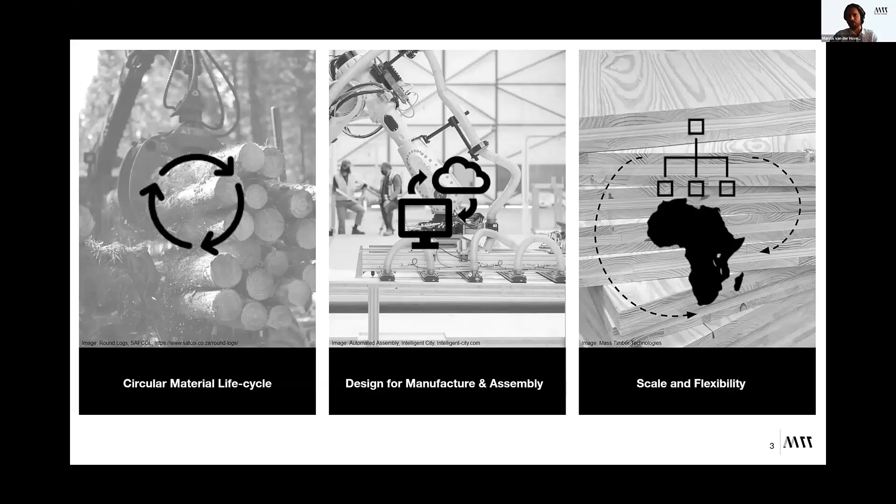The other element that we want to really focus on is the concept of design for manufacture and assembly, where we use the skills and technology available in 2023 to really solve all of the building design issues in a digital space rather than on site. And of course, the ability for mass timber, a material that we are learning about and bringing into a new context, to scale and be flexible enough to engage with many different building problems inside of the construction environment. Some of these techniques require us to engage with more advanced techniques of manufacturing, so a lot of CNC cutting, and obviously the integration of the project team in a digital space.

But it allows us to really create a material which, unlike anything before, can solve multiple building problems at one time. So, for example, if you use a CLT slab as a floor slab, you can also use it as a ceiling in certain instances. And for us, we're looking at a material that may be a little bit more expensive as an entry point compared to things like concrete and steel, which are prolific inside of the African context. We need to start thinking a little bit out of the box to make this material better, and we need to convince the project teams and the way that the projects get programmed to allow this material to become more relevant in the building environment, on a commercial scale at least.

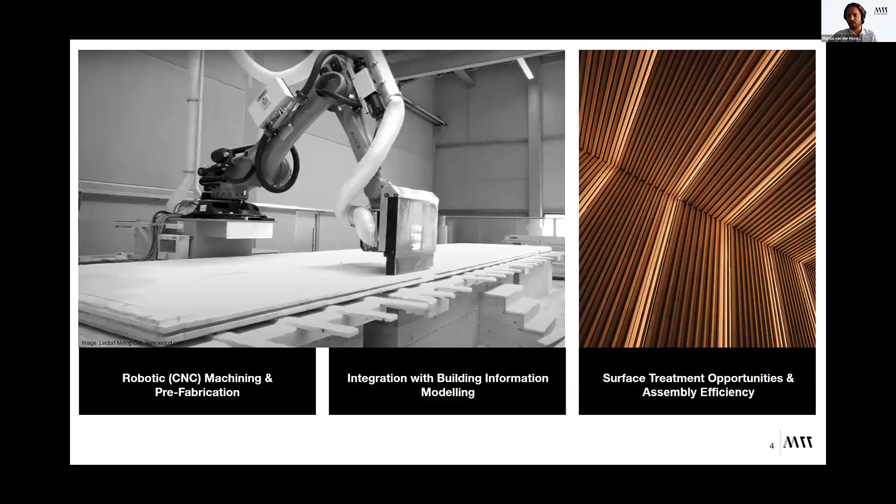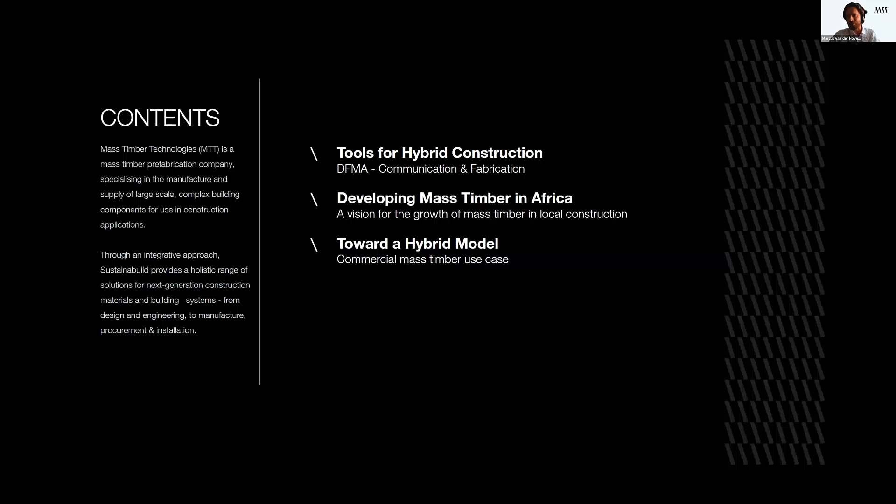So certainly, we're all aware that there's a massive climate issue at this point, and as building professionals, we need to be aware of the fact that our industry is responsible for the majority of our issues, especially when it comes to CO2. Cement and steel fabrication are the biggest contributors to this space.

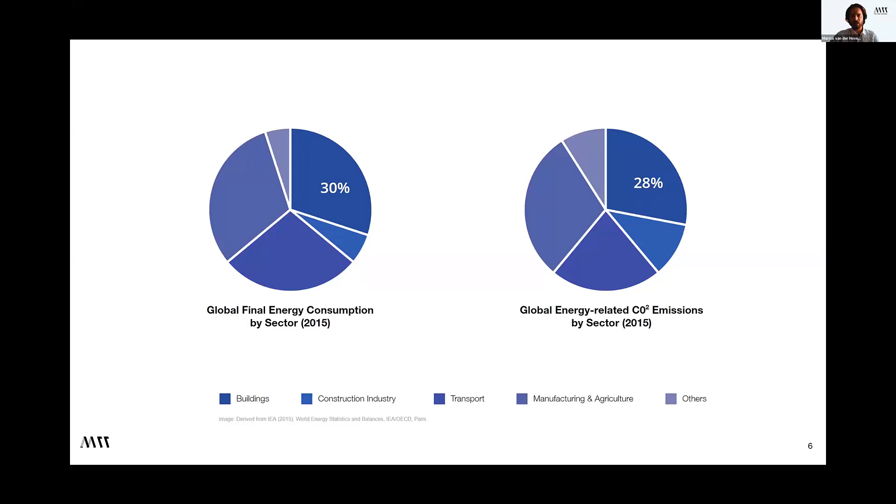And what we're trying to do is very quickly find a way to replace some of these primary structural elements like steel and concrete inside of the building environment to try and make a bigger impact on how climate change is developing. This is a big problem at this stage because it's not like we can just stop building tomorrow and just sit back and relax and just not use concrete.

We're expecting a massive boom in population, specifically in places like Africa. So the requirement for housing, the requirement for floor area and offices and infrastructural development is growing at a rate where we need to be ready with our skills and our abilities to actually solve the problem, rather than contribute to it.

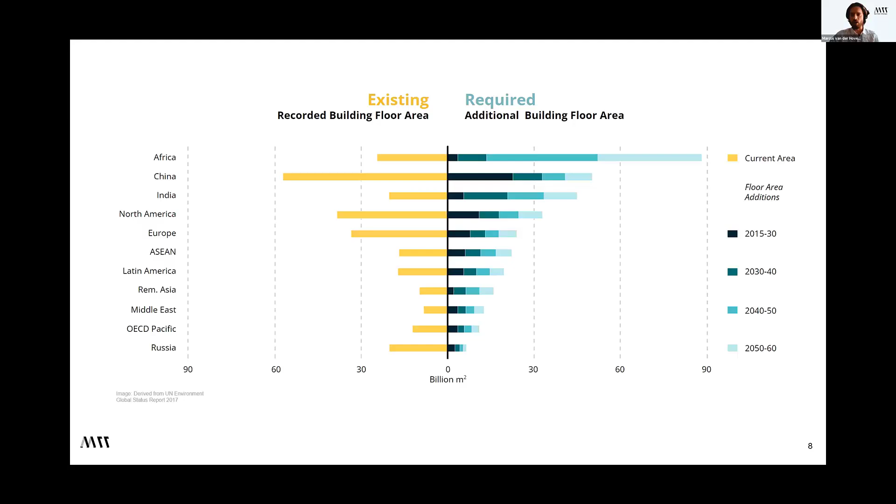And you've seen in many different instances, and specifically in South Africa, we've signed up to a pledge at this point, but it's slowly but surely becoming legislation where new buildings by 2030 need to operate at net zero carbon. And this is a big ask for the construction environment at this stage. And it's a big question, especially when you look at the structure, how we're going to solve this problem. And we believe from our side that it comes through in the form of mass timber.

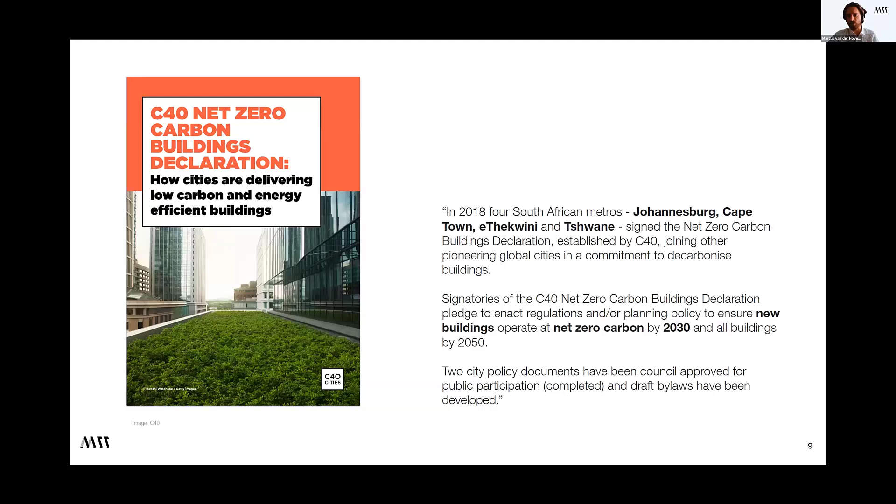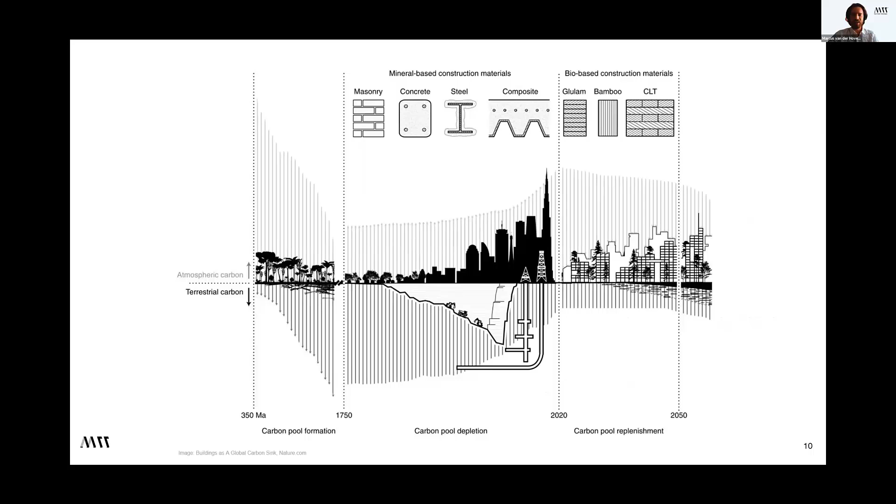So the big move that we're trying to make is stepping away from extracting carbon out of the earth and releasing it into the environment, but rather sequester it and keep it locked away inside of buildings, and maybe not turn it into firewood or chips where there's no value. So CLT for us, just as a basic concept, we're adhering solid structural timber members into a large slab to use as a structural element inside of a building.

You have many different forms, and we'll touch on some of those forms, and Oriel's also spoken about some of them. But what we're trying to do with mass timber and glue lamination of timber is create a predictable engineering curve for an engineer to be able to understand what the structural capability of this building is and do the mathematics around how that structure works.

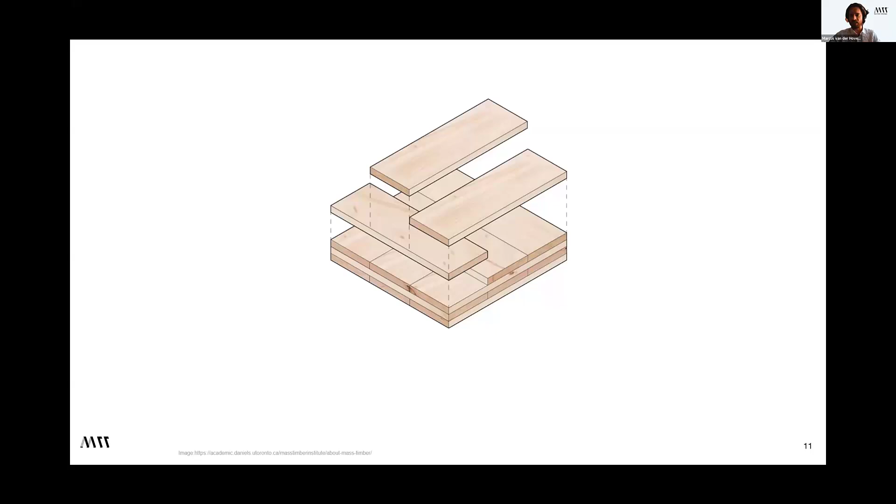Because timber is an organic material and there's different stresses and abilities to deal with stress on an individual plank. By laminating it together, we can create a homogeneous structural profile across that panel, and we can start predicting how it's going to operate. The same thing goes for the way it deals with fire. Same thing goes for how all these elements come together. It's all about making timber, which is organic, predictable.

And certainly, we're also not just doing this because of the environment. It's obviously a big player, but ultimately this industry growing in Africa represents a very large value proposition for Africa as a building context as well. Very often we see that our material is mined out of the ground, it's sent away to China to be turned into steel, and we buy it back at a premium, paying dollars for it.

So what we're trying to see happen here is the ability for us, in a very big industry in our continent, to localize our entire value chain. So from the guys growing it in the ground, the people sawmilling it, the people manufacturing and designing, and then the builders, we can actually contextualize that material completely to a region, which obviously helps with everything from shipping and logistics costs, and certainly the value that we can contain and maintain inside of our local context.

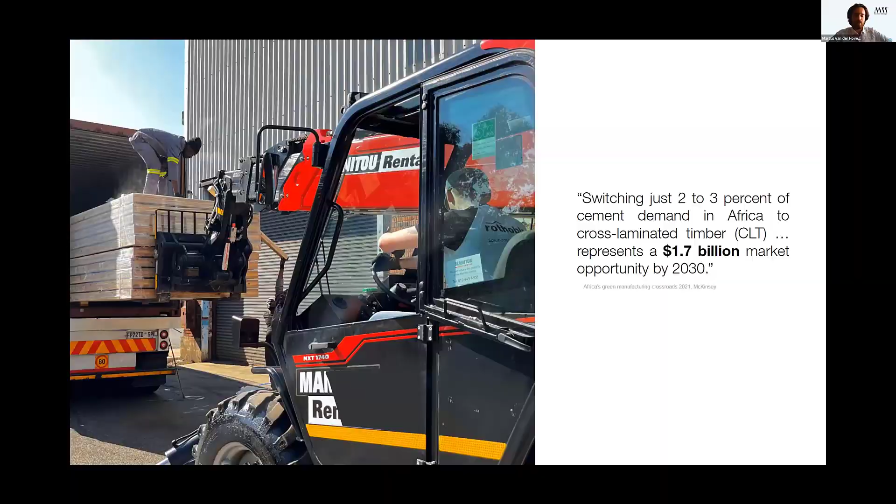So we've been manufacturing some pretty large elements at MTT right now. We've kind of taken a very big step, and since November, we've been operating and producing at a massive pace with larger and larger buildings coming together, everything from small residential projects up to a 4-story high building, which is currently being shipped to Zanzibar for construction in a couple of months, which we're very excited to see.

And it's all constructed out of 2 basic principles that we're focusing on. CLT, which is what we use to create floors, walls, and roof structures. And then the GLT components, which is simply just laminated in one direction and not cross-laminated, so that the performance of the fibers works in one direction, which is very good for columns and beams. So by bringing those 2 elements together, we can actually start solving an entire building problem rather than necessarily just doing small bits here and there.

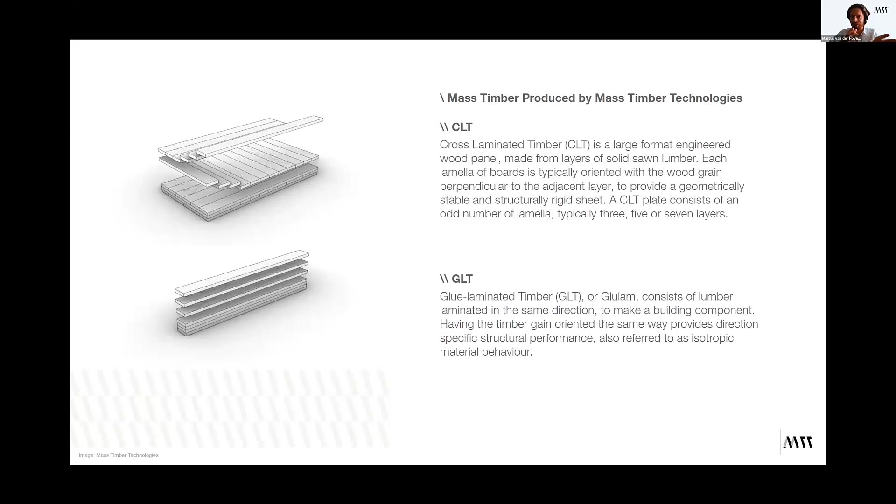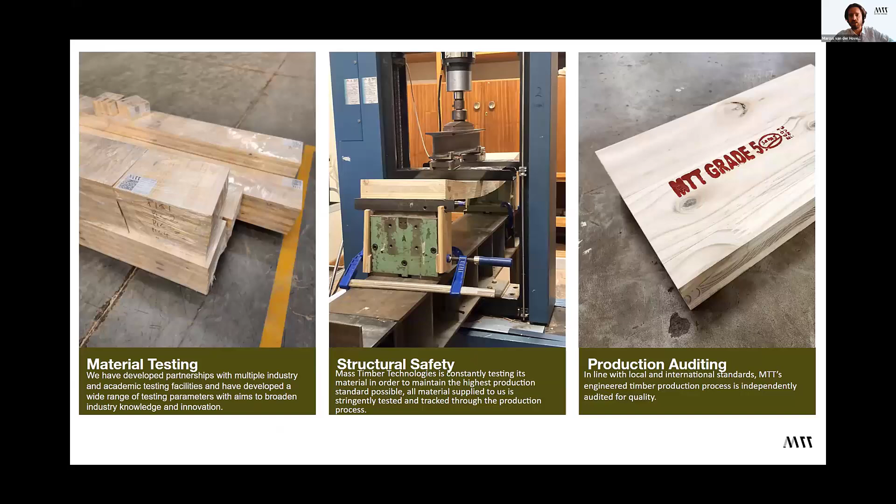We've done all the relevant testing on our local material, which is obviously SA pine. It's various different species, which I won't get into right now, but from multiple different contexts, we've managed to do the stress testing. And with the certification body in our local context in South Africa, there's actually a building code relating to our material now, which we comply to. So these are very big steps, especially in South Africa, that we've made towards making this material more accessible.

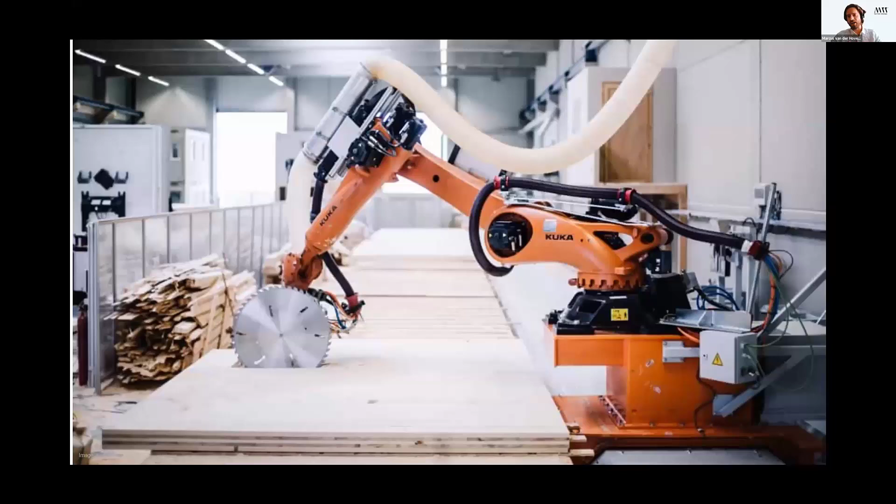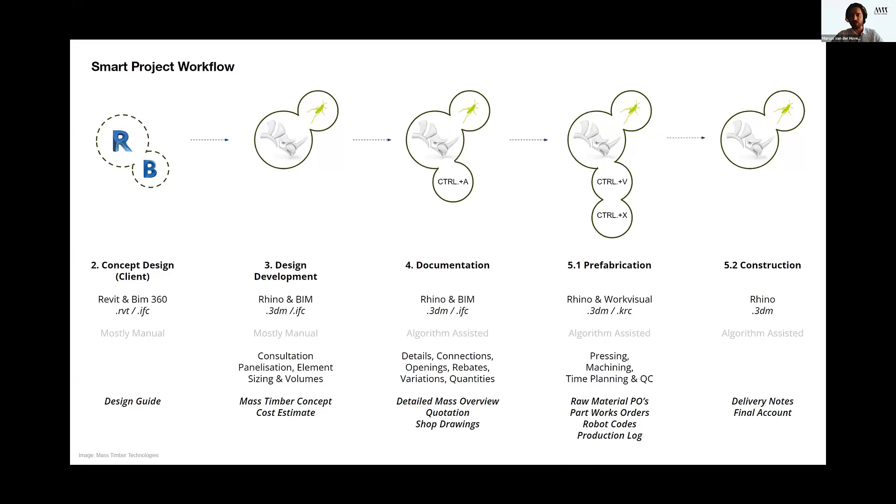We've also got a lot of work behind us, which is really the software element to actually help us integrate all of this into our systems. And this runs all the way through from being able to integrate with how an architect thinks and then turn it into a digital set of information that we can then access as manufacturers, and then the builder can use. And like Oriel said, it's trying to turn it into a kid's plaything where it's like a Lego assembly kit with a set of instructions, which makes a simple process of installation on site possible.

So obviously we've done a lot of different coding. We've managed to set up a whole bunch of different robotic techniques to actually fabricate this, which means that 99% of the building is actually created inside of a factory, in factory conditions, very accurate. And that means no waste on site, a very small labor contingent on site, no mistakes on site.

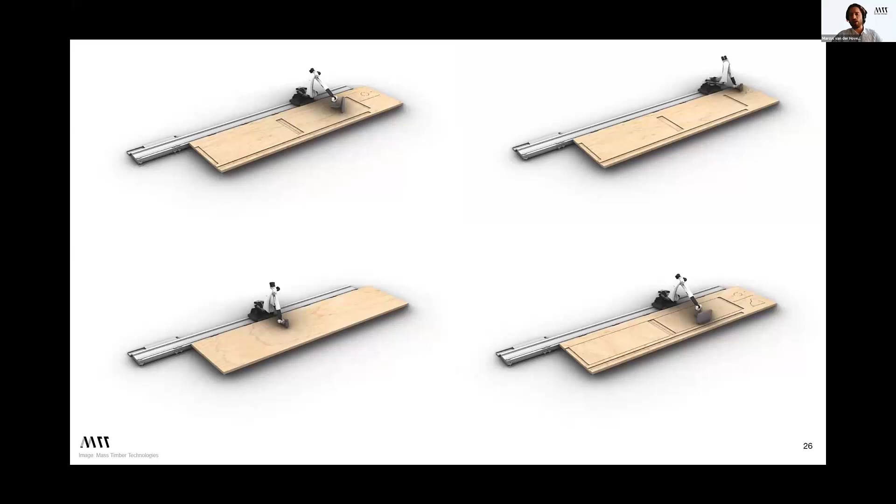And when you start adding all of these things up together, you'll see how effective the mass timber system can actually be. And what we're trying to do is basically pull the construction environment out of a terrible hole that it's sitting in, and using information technology and advanced manufacture, we can start creating a more effective and efficient way to build.

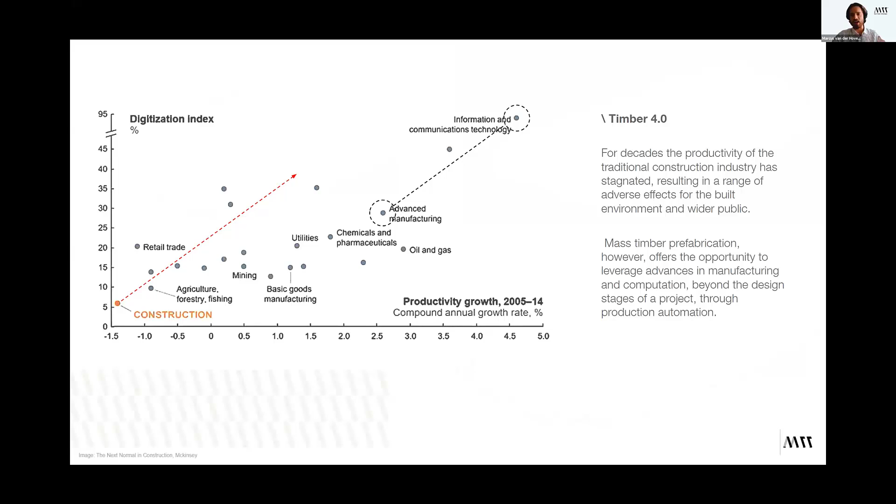And I'll touch on fire in a minute, but yeah, the tools are there now. We've done the research for you and it's available. So there's no more excuse not to be able to use this material in your project.

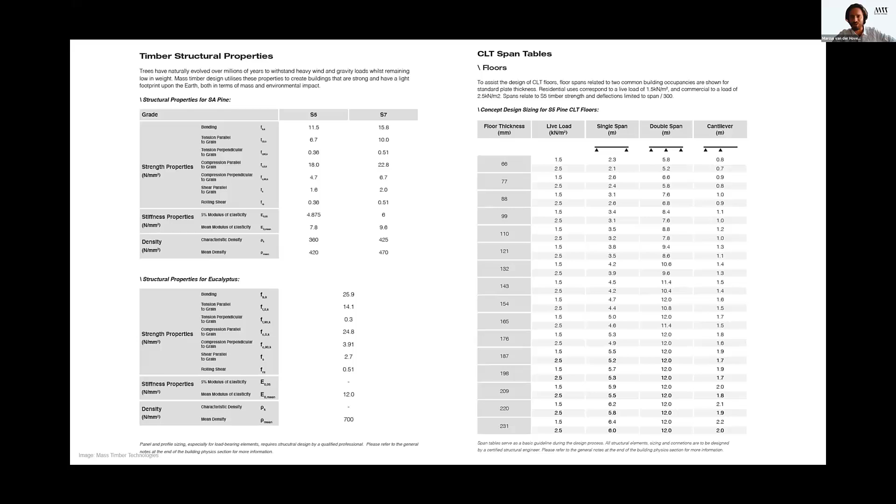So ultimately, what we're trying to do is make the difficult process of planning a building exist inside of a digital space. That's the core thing that I want to drive home: our ability to design with CLT inside of a digital space is where projects become really efficient.

And what we're trying to do is take all these different components, because there's a lot of them when you build with this technology, and turn them into data that can then be very easily understood on a building site. And we'll show you an example of this quickly.

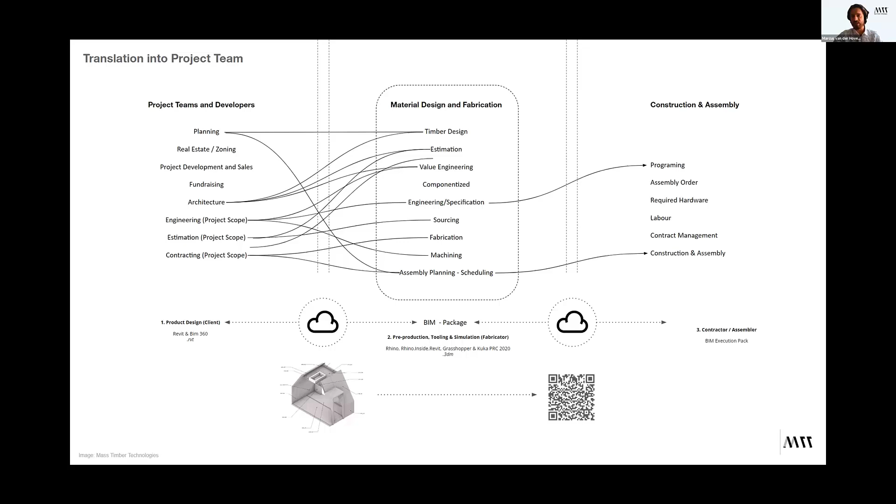Here's a house that we've just completed in Johannesburg. It's a designer sitting in Durban, an engineer sitting in Cape Town, us in Johannesburg, and none of us were actually in the room at all when we did this project. And the entire project got to site with a contractor that's never used CLT before.

So we simply worked with the engineer to work out exactly the different connections, the different screw placements and the thicknesses of the panels. And once we went through all of that, we could create a digital twin of our building that the engineer and the architect could both sign off on, and the working drawings could be created by our system. And then the contractor could very easily assemble this.

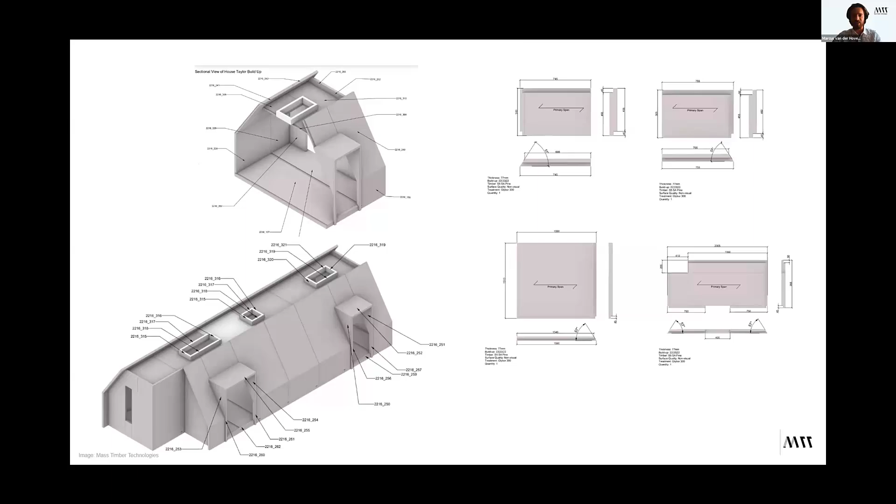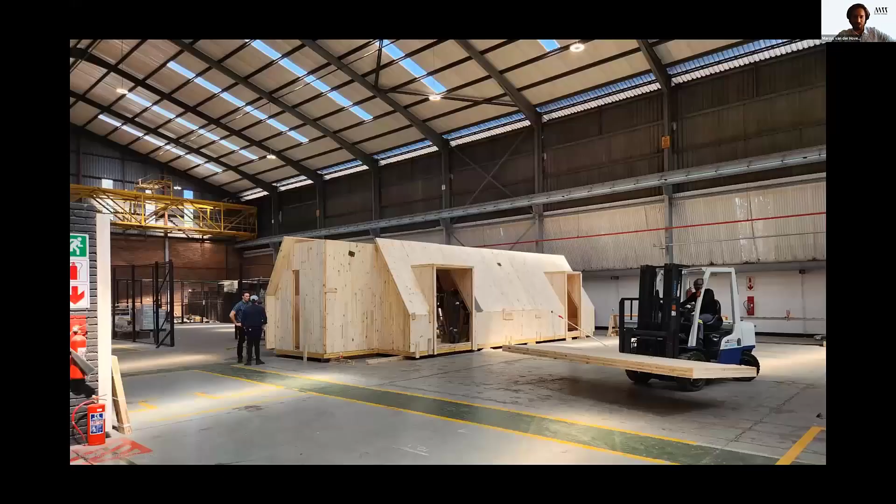And what that has allowed for is that a contractor who's never used this material before could, within 1 day of using this material, we did a quick mock-up in our factory using our gantry crane, get this building constructed to this stage here, him and 3 other people with a bunch of screwdrivers and the right techniques. And we've managed to create a very easy system, which made it very easy for the client to accept this material as well.

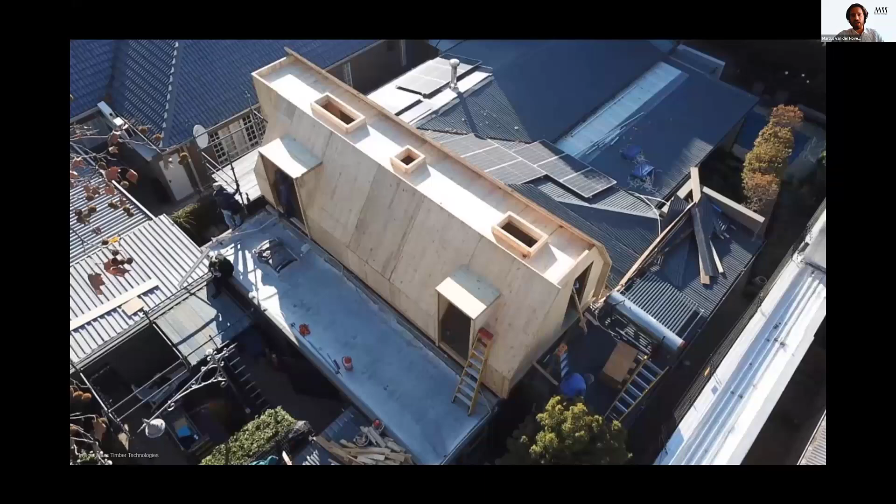So they had to take a section of the client's roof off, and day 1 was removing the roof. And by the end of that week, the building was actually in place and ready to be cladded. I've just got a quick video here, which will basically show you exactly how the site looks on this client's house as well. And you'll see there's no wheelbarrows, there's no cement, there's no water, there's no damage.

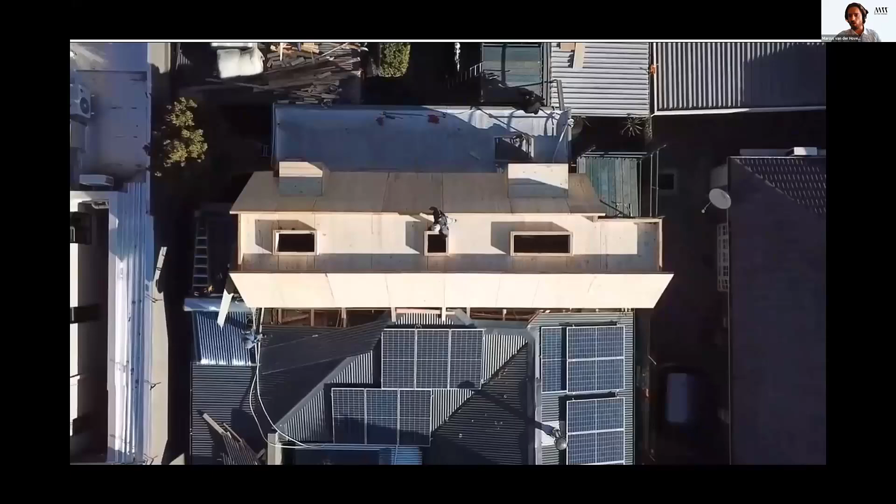This is a very effective way to build. It's a healthy way to build. The contractors like it because they end up being cleaner when they go home than when they arrive to site. And it's a fundamental thought process that we in the construction environment need to change our minds about when we look at a building site.

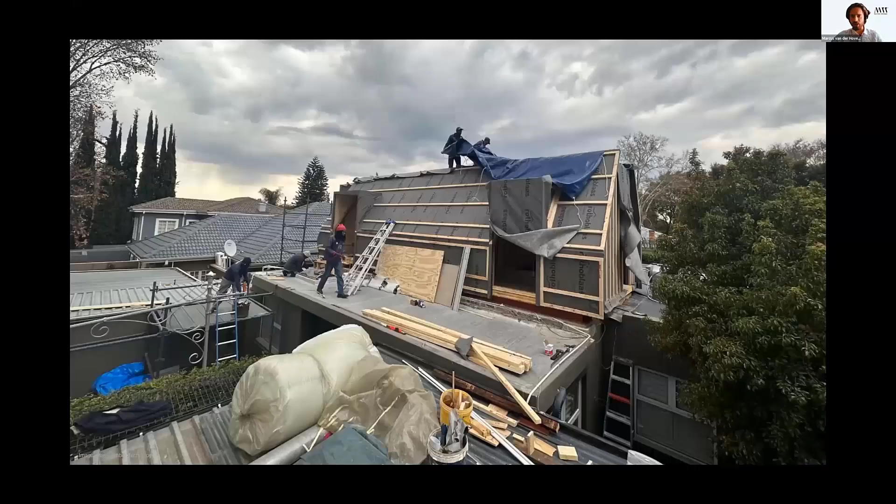So yes, by the end of that week, the building was weather tight and ready to accept cladding, and actually got completed. The building was done, I think, in 2 weeks. This whole construction process was finished. So they had the full European spec. The client was quite keen to do the whole shebang.

So they've actually insulated and cladded on both internal and external faces, surface mounted all of the conduiting. And it was a very effective process, a very easy way to build because there's no cutting and welding and difficult materials on site. It's just screw in and there you go.

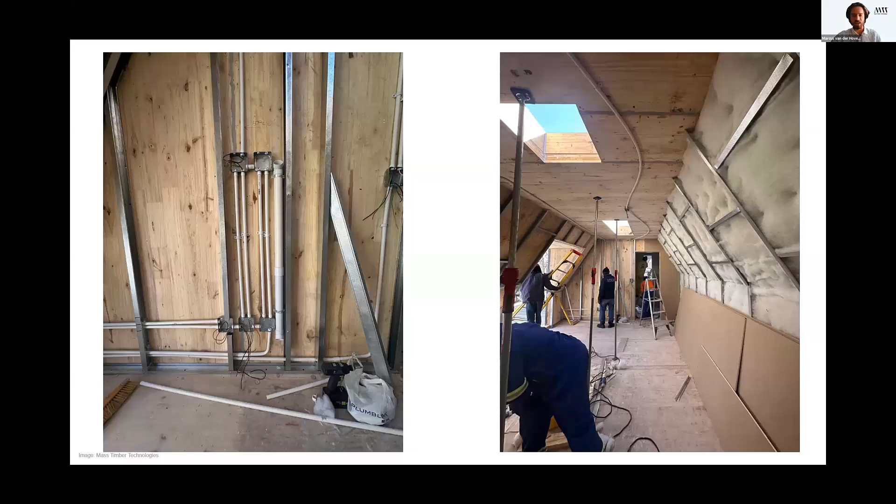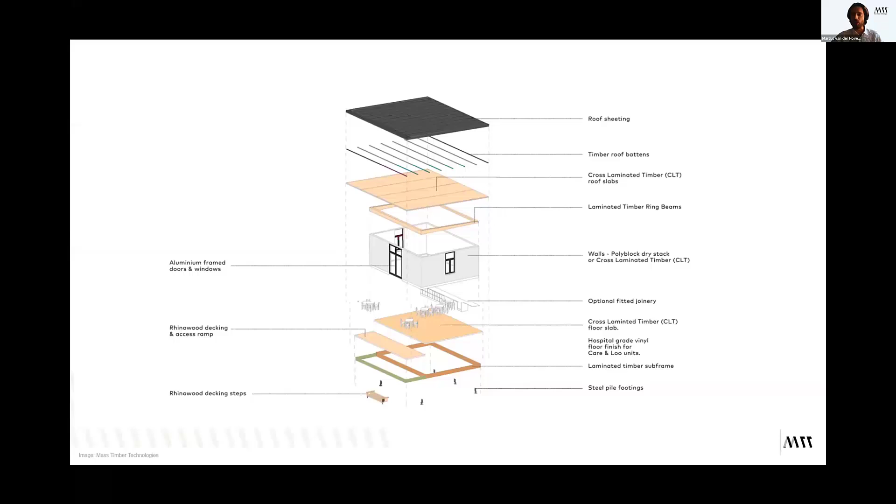We're also able to build with this material in very remote places. So here we did a project just outside of Drakensberg. This building got built in 5 days as well. It's a lower spec of construction, but we have the ability to go to places where you don't need water or advanced technology or big contractors, you just arrive with a crane and a system that has been worked out all on the front end so that when you get there, it's ready to go. This is how you make this material very effective.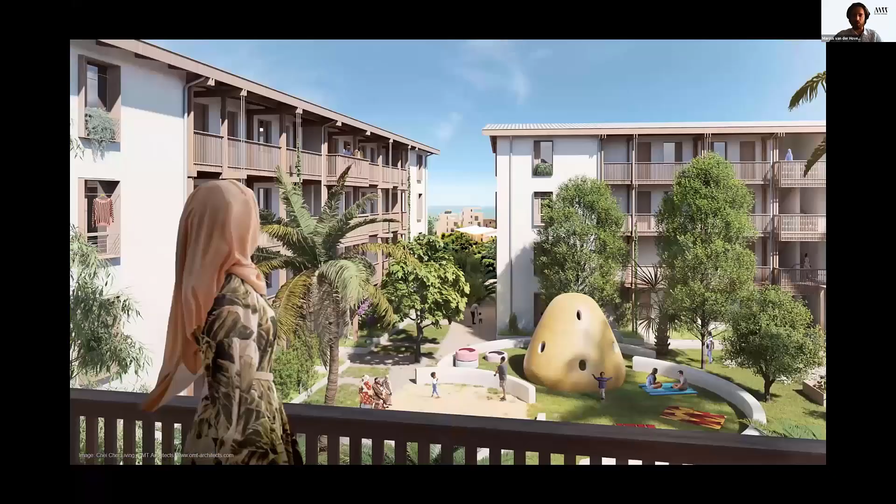So right now, one of the more exciting developments we're working on is the Chei Chei project, which Leander will also mention. He's the architect on this project. It's a 4-story high development on Zanzibar Island. And this project as well was designed with an architect operating out of New York some days, Kenya some days, and the Netherlands some days, engineers in Germany, fire engineers in Germany as well, and the client in Zanzibar.

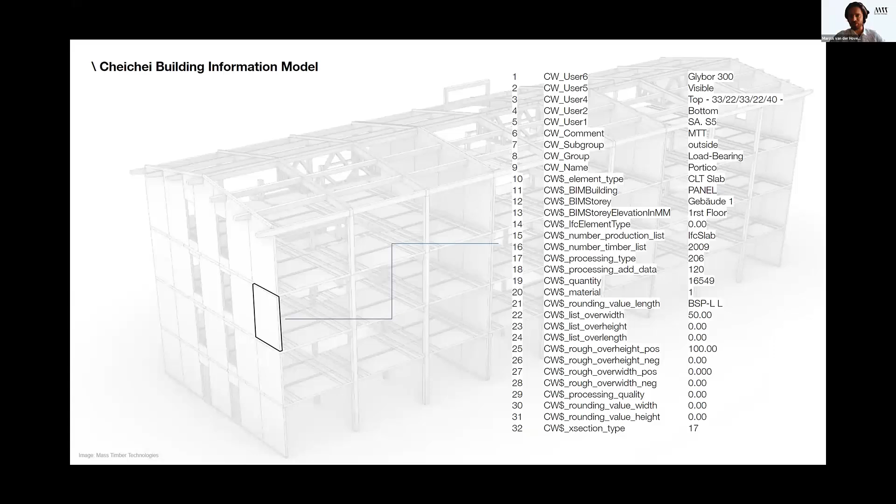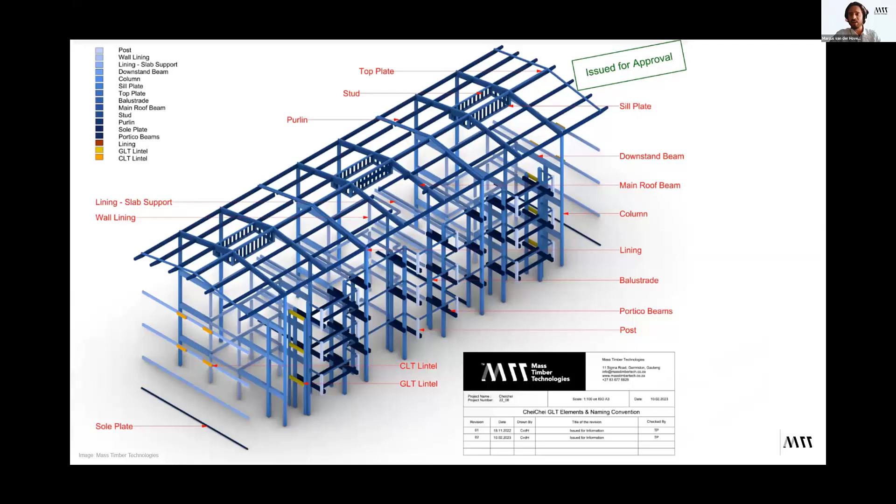It's a global project, but ultimately our team of 4 people were able to unpack this project by using building information modeling to contain all that information. It's quite an advanced way of thinking in terms of being able to actually use the full potential of our design software. But once we get it right, it's so easy to understand, and there's so few mistakes that are able to happen. So we can define the components of the building very effectively and create an environment that mistakes and waste don't happen on site.

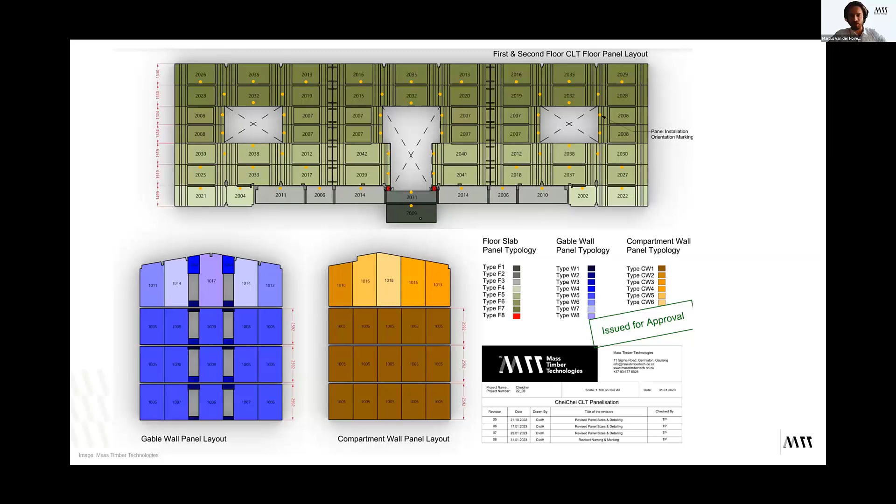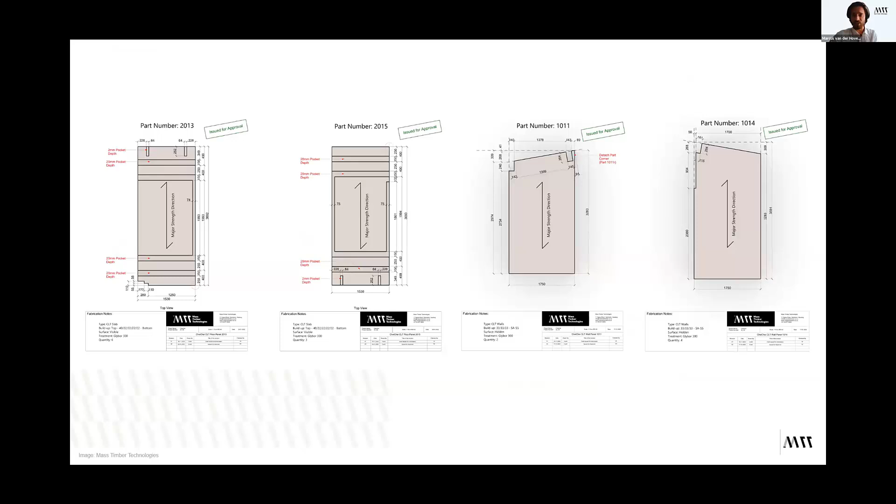So we can actually containerize an entire 4-story high building inside of 4 containers and send them, and it still works out in terms of a very acceptable budget if you compare to other materials as well. So, for us to be able to break down that building into all the different joinery techniques that are required for us to then machine, it's very important that this information gets understood by all the parties involved. But then for us to go and access 1,091 total timber parts, and 165 of them are unique.

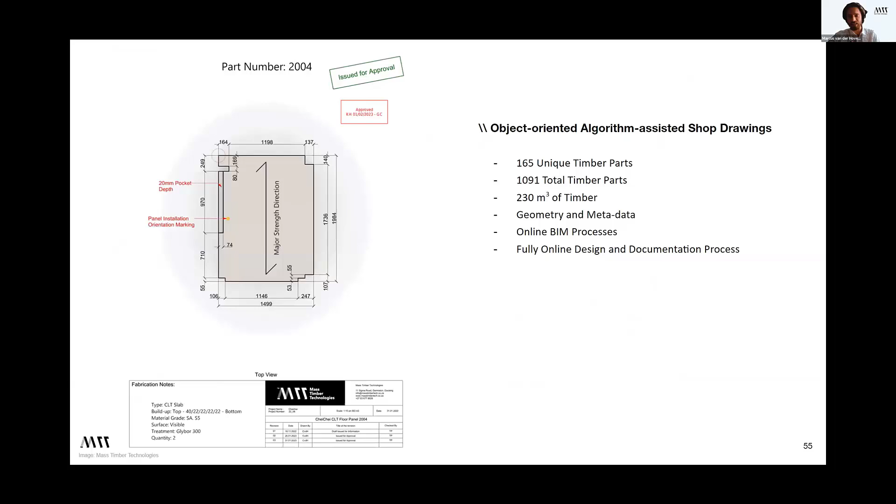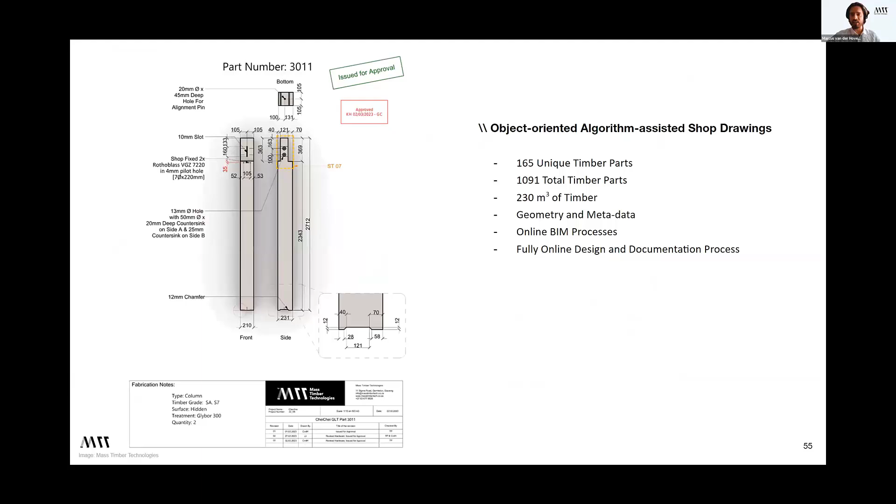Again, it's a mind shift that we have to work away from, where you typically go to a building site and go pack bricks and then you're done. But here we have to actually do all of that thinking on the front end, and that's what makes this material work so fast on site. And that's where we win in terms of how the costing and the pricing works. We have some very interesting technology that we're developing, which is like generative design algorithms that help us work the most effective panel sizes once we have all of the designs together. But I won't get too deep into this.

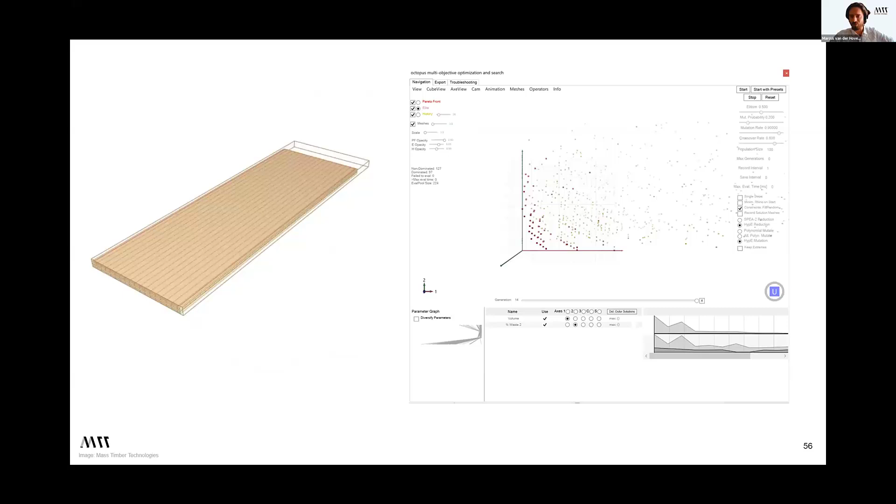But it is about us being able to, in an African context, we're all South Africans. There's no fancy German technology here. It's just our own minds and our access to the internet and research. We can actually make sure that we're on the leading edge of material thinking and computer generated work as well. So yeah, this is what a 4-story high building looks like, flat pack, like a piece of IKEA furniture. So yeah, it was a very fun project for us to work on.

Inside of our design guide, we've also actually listed out all of the different details, which we've taken from the European context, and we've rationalized them more for a South African system. So you can look at this and you can start understanding that maybe we don't have to build our walls so thick, but we can actually access the material a bit easier and make it more effective for our local context with different climatic requirements as well.

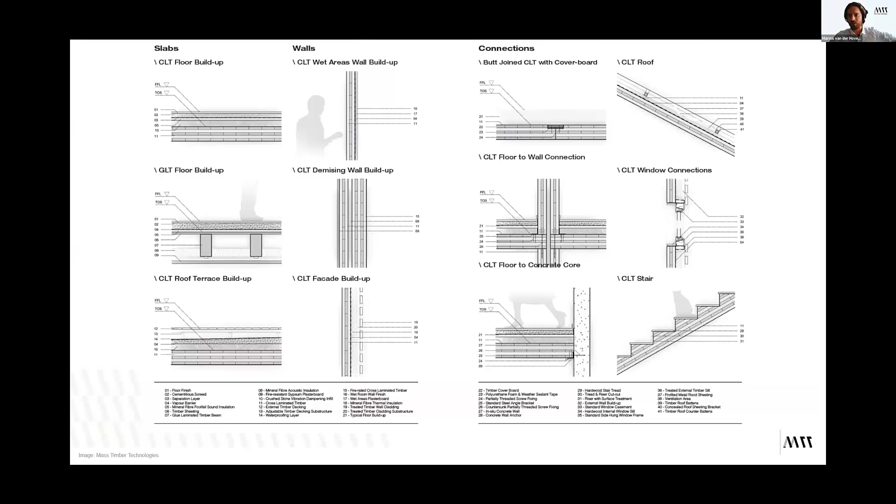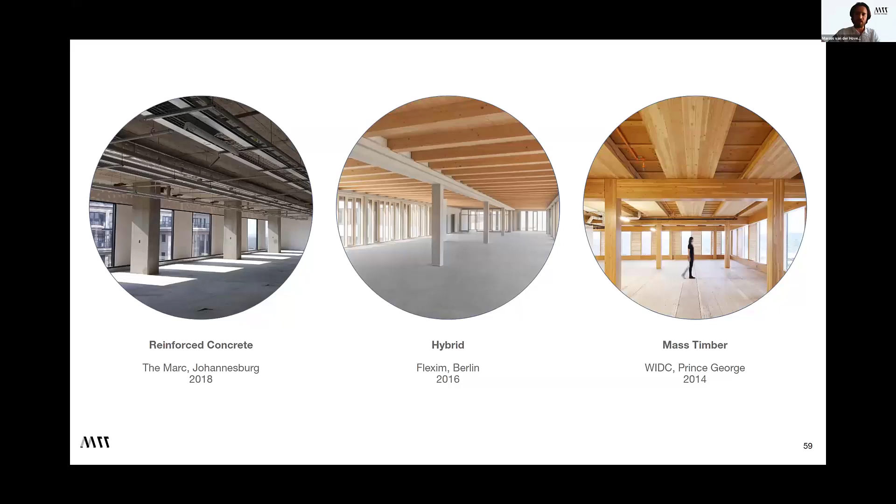So I'll leave you with one more thing to think about, and it's just really a thought process. We're trying to move from the left to the right here, from high concrete use all the way through to total mass timber. Obviously, we have to think about the process of consuming too much timber. It's another thing that Oriel touched on. It is a resource that we have to maintain. So we find that for the time being right now, the early steps, especially in Africa, is for us to hybridize these systems. Make sure that a client is still feeling confident with his construction process due to the fact that there's a technique that he's familiar with. And we limit maybe to 30% of the building product to be hybrid mass timber right now.

So a low piece of hanging fruit for us to look at is the floor slabs of a high-rise building, where 80% typically of your building's weight exists in the floor slab. So what we found with this is that, sure, we can have a contractor feel confident in his structural frame, and we can use the ability of CLT to act as a diaphragm, but also start limiting the amount of concrete that they use, especially if it's such a large target for us to look at. So this way we can actually lighten the foundation load. It's much less intensive earthworks, much less concrete required in the foundations, and we can leverage a lot of speed to get this building up a lot faster because we're in a prefabricated system.

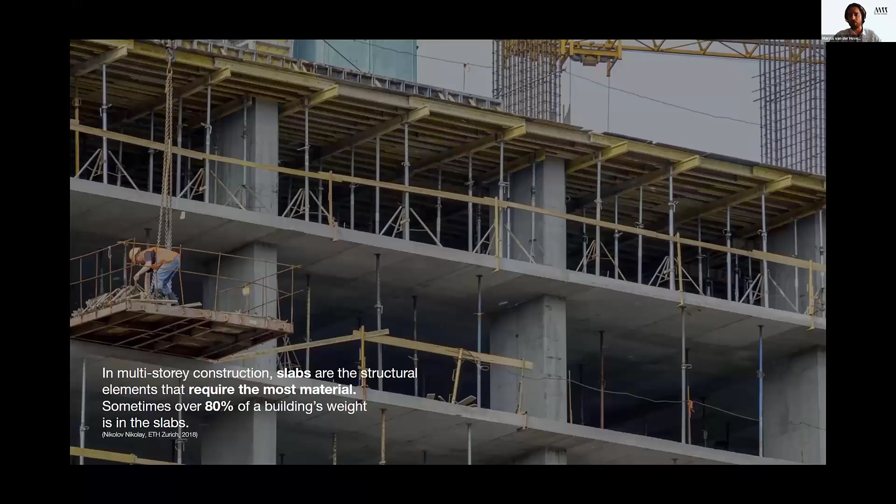So we like this system here. This is part of the Shea building. It's a TCC. It's a sort of a timber concrete or CLT timber concrete hybrid slab, where we really help with some of the problems with CLT, like fire and acoustics, especially when you work into higher rise buildings where you need a very high fire rating.

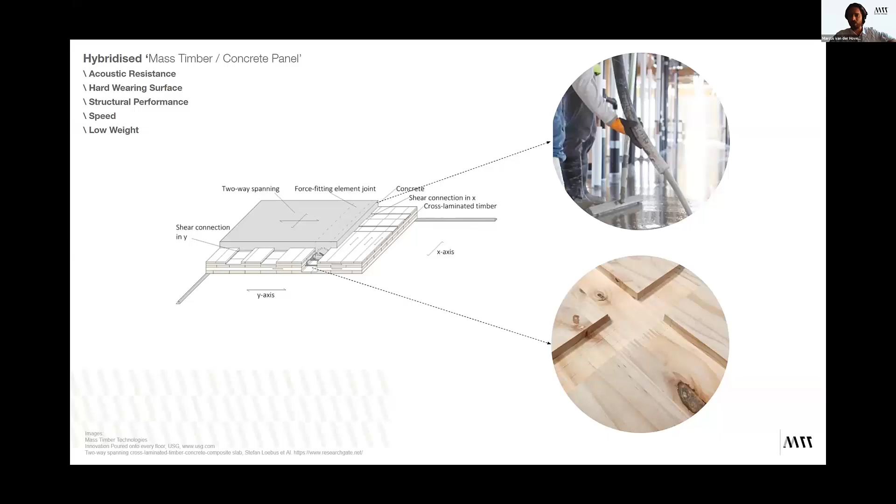This is a system where we can actually reduce the concrete by about, I think it was on our one project, about 70%, but you still have the benefit of concrete working in action with that timber, and obviously solving a lot of the problems that come with timber construction as well. Here's a typical detail of what the floor slab might look like. This gray area that's hatched here in the center represents the sort of charring layer of CLT.

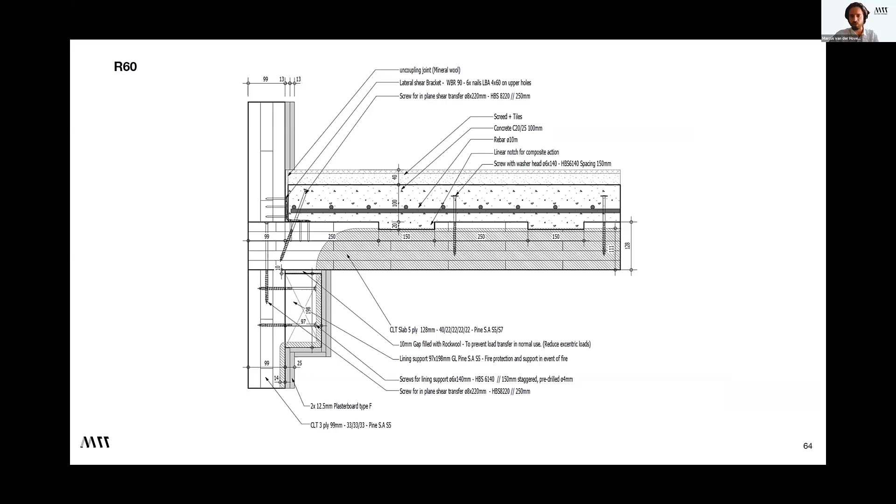So on this building specifically, we needed a 2-hour fire rating for the floor slab. It's very difficult to do with CLT alone, but due to the fact that we could actually use this concrete hybrid slab, we can play with the positioning of the rebar and the thickness of the concrete, and then also some of the coverings that are required on different elements of the floor slab, and we could achieve a 2-hour fire rating with this. And this is just sort of a breakdown of exactly how that system comes together.

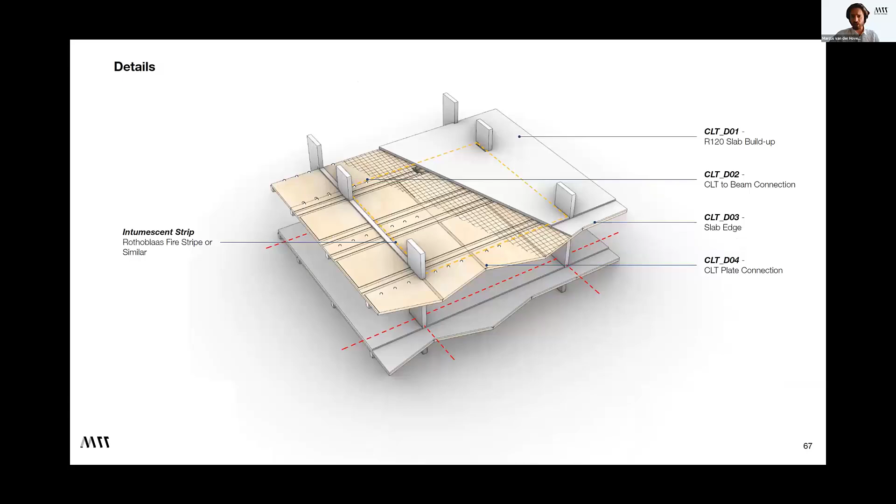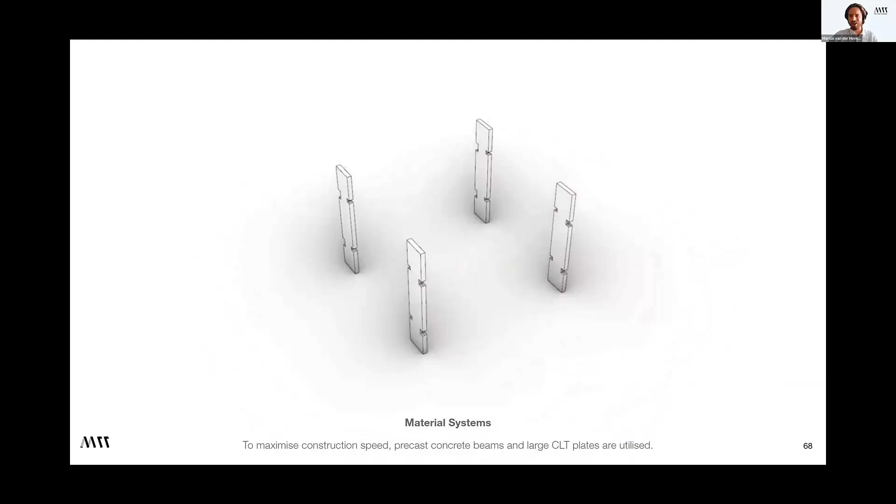So when you look at the system all come together, you have basically your precast concrete floor slab, concrete columns and beams, a timber laminated beam in the center, our floor slabs come in, and on top of that, you throw in a concrete surface slab. It's also a really nice thing for developers who don't want to worry about the timber floor or a very complex build-up of floors. They could just go tile on top of this thing and it works the same as what everybody's used to. And this is where we see a huge potential for us in the environment.

So for this specific example, this was an 11-story high tower that we were working on. The reduction in weight of this building was represented at about 70%, which means that we could actually not only sequester 2,000 tons of carbon inside of the floor slabs, but we could also reduce the concrete usage after the fact as well. So we're actually stopping concrete being poured, which is quite an interesting exercise to think about.

And ultimately, what we're able to do is reduce the construction time, and in this case, it was about 40% of the construction time. So if you look at the whole project scope, sure, the CLT may present itself as a more expensive material, but once you start looking at the impact on your foundation, your time, how propping and formwork might work on the construction side, 28 days of drying times, all of that combined together, we could actually start being on par with the conventional build.

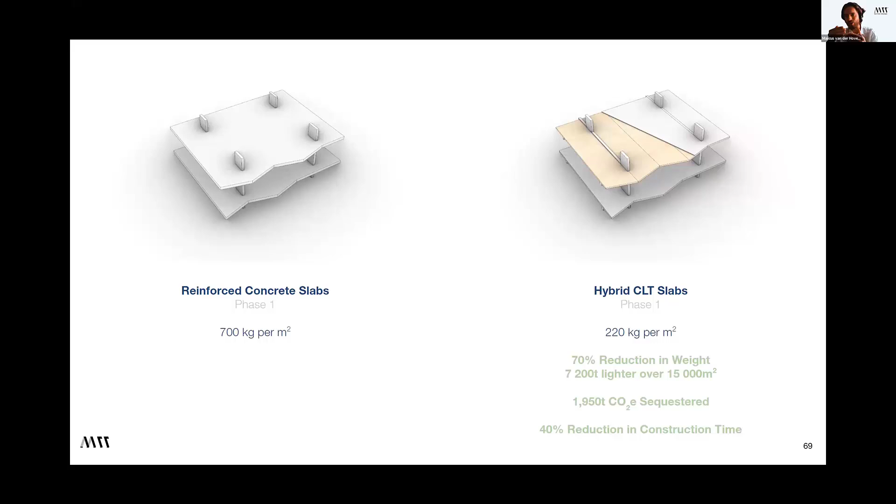And I'll skip this one. It's fine. I know I'm on my limits here, but this is the last slide.

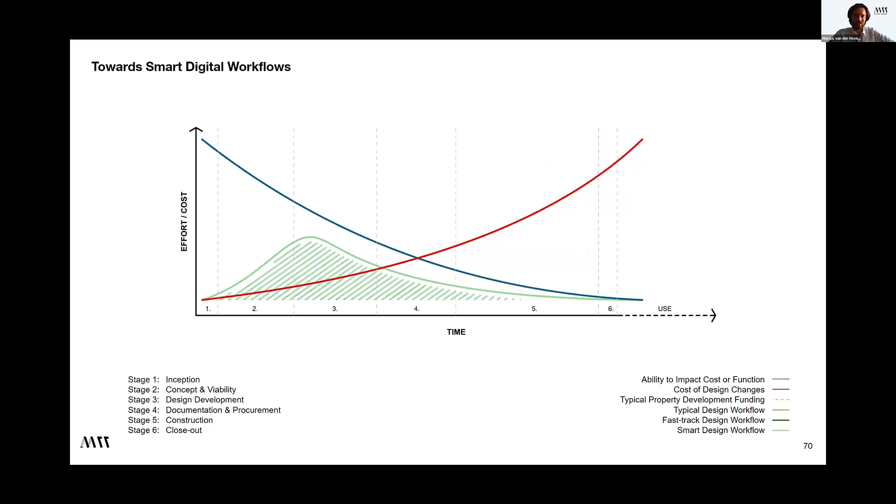So the big point we wanted to make is that we just want to see how we could potentially look at changing the way that the construction thought process works, where instead of planning the building towards the end of the construction cycle, we push that planning to the start. And that way we're going to actually be able to save money in terms of our design process to then spend on timber, which I think is an interesting way to do it. I'll leave some thoughts for you here.